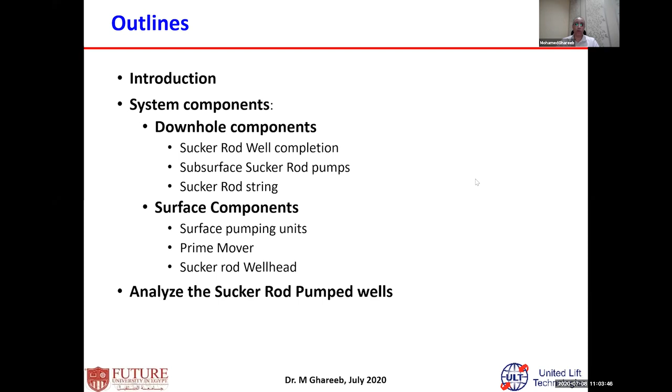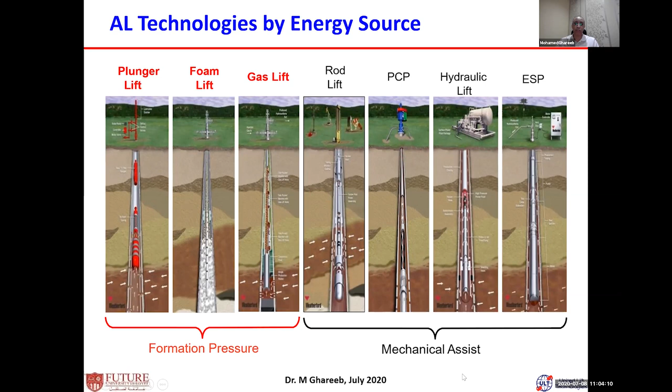We talked in the introduction of the artificial lift system about the different types of artificial lift: either using formation pressure to assist the fluid to reach the surface with a certain wellhead pressure capable of moving the fluids to the separators, or mechanical assist. Mechanical assist has different types. Today our subject will be about the rod lift system, or reciprocating sucker rod lift system.

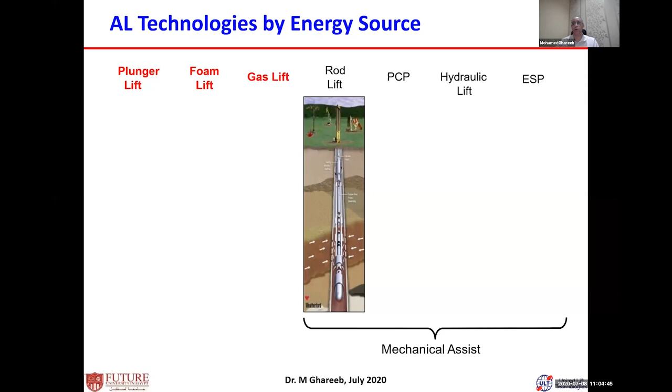This type of artificial lift has been used for more than 5,000 to 7,000 years. Currently, over 72 to 75% of artificially lifted wells use the sucker rod pump, the reciprocating rod pumping system. It's not only used for lifting oil; in some areas it can also be used for gas wells. How can it be used for gas wells? We can go into detail about this later on.

What is the reciprocating sucker rod pumping system? This is a picture of the whole system, from surface to downhole.

The sucker rod pumping system is the most popular artificial lift method, the pure mechanical method, used worldwide. More than 75% of wells use rod lift systems to lift from 1 barrel per day up to over 6,000 barrels per day. It uses a surface pumping unit to convert the rotary motion of a prime mover, which can be an electric motor, diesel engine, or gas engine, into reciprocating motion through the beam pumping system. This reciprocating action activates the downhole pump through mechanical links called the rod string.

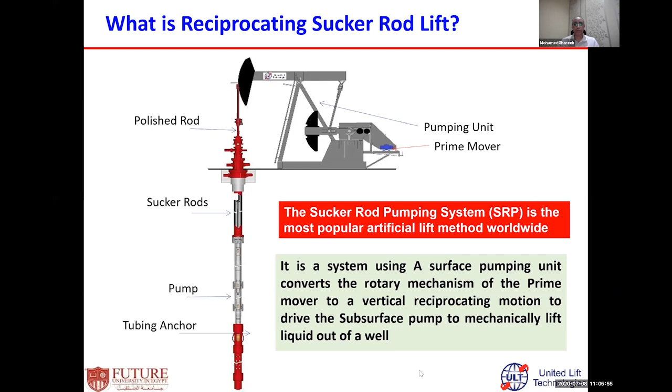What are the applications of this? As I said, more than 75% of wells worldwide use this type of system. Why sucker rod, and what type of applications can we use the reciprocating rod lift system for?

First of all, the sucker rod or reciprocating lifting system can be used for all well or fluid conditions. Sandy wells - if the well produces a very high percentage of sand, for sure there is a problem. Sand is a problem for all mechanical artificial lift types, but sucker rod can currently handle a certain percentage of sand. For example, there are wells in Oman where if you stop the well for an hour or less, you can have 1-2 joints over the pump full of sand.

Gassy wells - you can use a rod lift system for very high gas ratio wells. In the old books, they said sucker rod is for liquid or dead oil, but currently there are multi-phase downhole pumps, so a rod lift system can be used for gassy wells. It's used for all types of crude oils - heavy, medium, and APIs up to more than 50.

Some units are lifting wells with more than 50 API. Also, this type of artificial lift is completely mechanical, so it's not too affected by pumping pressure or bottom hole flow pressure. It works as long as you have a fluid level at the pump.

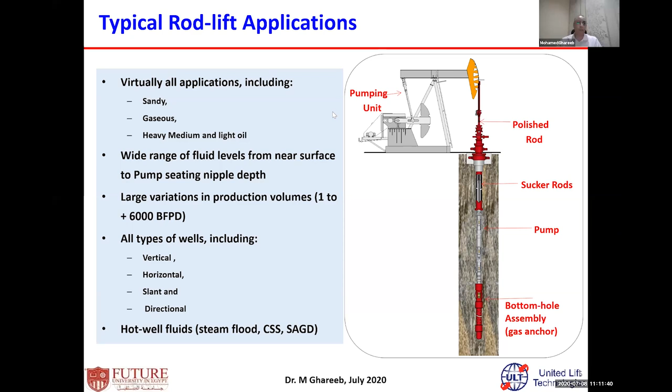But why do more than 75% of the world use rod lift systems? Why do people continue to use more and more rod lift systems?

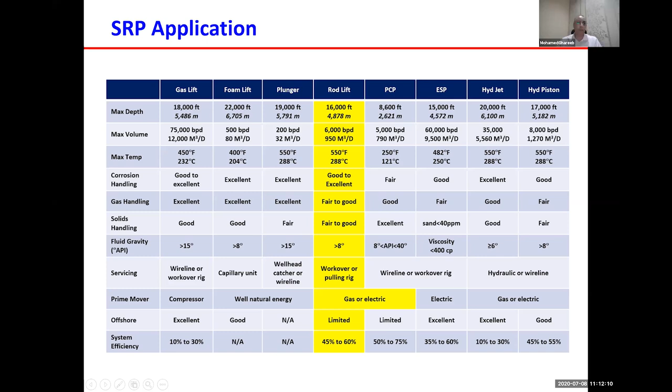According to most studies, if you are studying and screening artificial lift for your wells and you found the reciprocating sucker rod pumping system can work, use that system. Why? Because it has a very high system efficiency. The losses in power between the input power to the system and the output power to lifting the fluid are not too much.

It comes after the progressive cavity pump. This is the second type of artificial lift that can have low losses in power between input and output. All the optimization control is available, you can optimize the system from the surface to control both the downhole and surface equipment.

If you design the system to produce, for example, 1,000 to 2,000 barrels per day, and due to depletion in the reservoir the production drops, the fluid level drops, pressure drops, and production drops to about 20, 50, or 100 barrels per day, using this optimization you can adapt and use the same system to maintain production.

Positive displacement, for that reason, means you can displace fluid up to the pump depth, and you can also create very high pressures at the wells because it's positive displacement. I will show you later how the downhole pump runs to understand what positive displacement means.

If you have a problem with the material, you design the pump initially for downhole conditions suited to sweet crude oils with no CO2, and with time if this problem starts to appear, you can change the downhole material and so on, as you have very high flexibility to change the pumping parameters based on bottom hole conditions.

Very high salvage value, because the majority of the cost is in the surface equipment. 75% of the artificial lift cost in a rod lift system is in the surface equipment, so it has a very high salvage value.

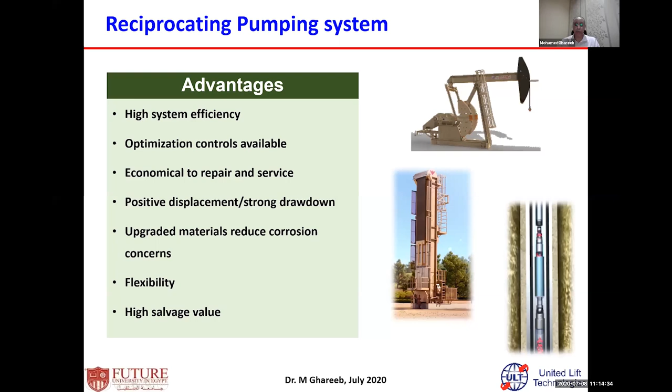For sure, like all other artificial lifts, they have some limitations. One limitation I mentioned before is that it can be used for deviated or horizontal wells, but even then the running life and mean time between failures will not be high. There is also a potential for tubing and rod wear.

For design, you need a special design, special rods, special downhole configuration in order to match special pumping parameters and so on.

Gassy wells, yes, there is a problem for gassy wells with all artificial lift methods. If you have gas, the volumetric efficiency will reduce. But this type can handle producing from very high gas ratio wells, and you can improve your downhole volumetric efficiency.

Is it depth limited? For sure, it can be used down to 16,000 or 17,000 feet. But with increasing depth, the load over the rod string and the pump will increase, so the production capability will decrease, meaning the amount of fluid you are able to produce decreases. For example, you can produce 7,000 barrels per day, but only from depths of about 700, 800, or 1,000 feet maximum. From 17,000 feet, you cannot produce more than 100 barrels per day.

You cannot use it in an area where people are living, or offshore areas, because they have some environmental effects and environmental problems and so on.

What are the system components? The previous slides were just an introduction. What are the main system components? Let us divide it into surface equipment and downhole equipment.

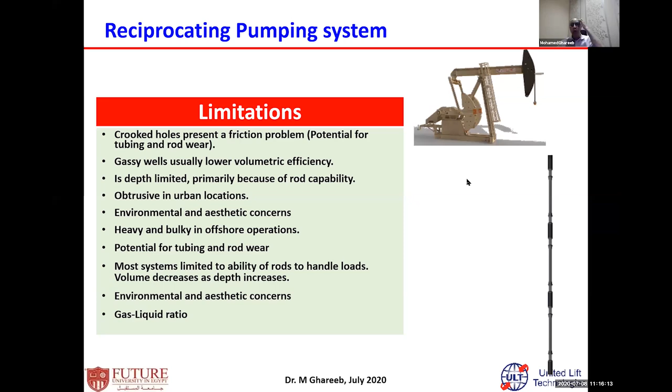Looking at downhole equipment, the first part is the sucker rod well completion. What do I need to consider in the well completion for the rod lift system? It is one of the simplest well completions, and you only need to have some, or maybe all, of these components. You need a production tubing, and this tubing can be the tubing itself, or some people use casing, hanging the pump inside the casing, and you can produce with no problem using a special downhole configuration.

But if you use tubing, you need a seating nipple to set the pump in a certain position. Plus, for certain wells, when the depth increases more than 3,000 to 4,000 feet, there's a tendency of tubing movement with the pump reciprocating.

Then you require what you call tubing anchor catchers, and so on, just to eliminate tubing movement, plus the wellhead of the sucker rod, and so on.

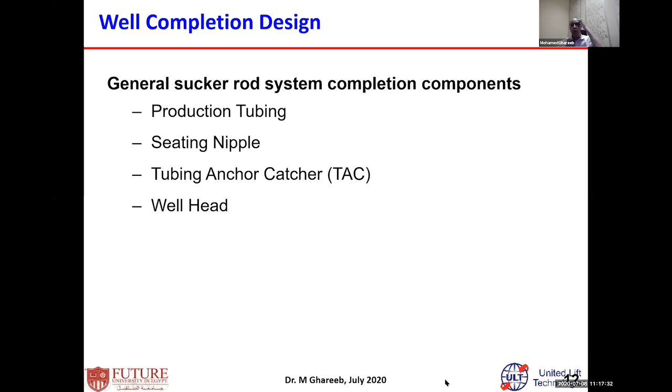In a very simple way, if we assume this is a casing and this is the formation, you need just to run the tubing. For shallow wells, you only need the seating nipple. This is a very simple completion for the rod lift system for wells produced from 3,000 feet and shallower.

Then you can run the pump. This is a downhole pump. You run the pump over the rod string and sit it inside the seating nipple. This is a very simple completion for the rod lift system.

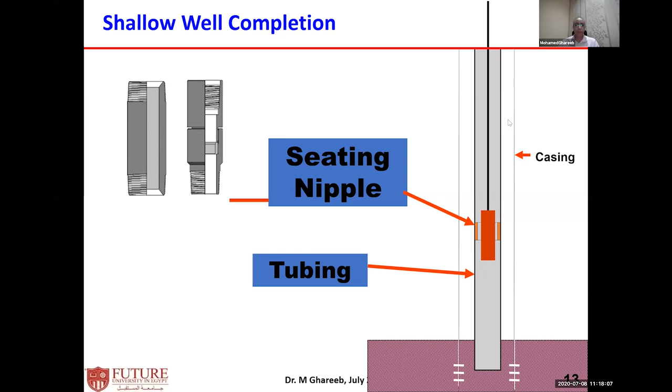What else? But remember, this sucker rod is moving up and down. While we are moving up, this is a rod string, and this is a tubing. This is a pump, and this is what we call the traveling valve.

This is the standing valve. While we are going up, the traveling valve is closed, then you're lifting the weight of the fluids. What is lifting the traveling valve with a plunger is the rod string. Then all the weight of the fluids will be on the rod string, and the rod string will be under tension, but there will be no fluid load on the tubing itself.

Then the tubing is contracted, and you have this shape of buckling of the tubing. In the downstroke, this valve is open, and all the weight transfers to the standing valve, which is connected to the tubing, so the fluid load transfers to the tubing. This is the tubing's expansion. Then you have tubing movement with each stroke.

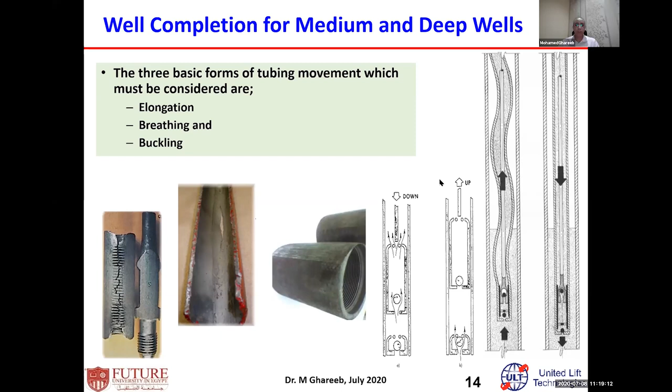In that case, you need to have what you call a tubing anchor catcher, just to fix the tubing to the casing in order to prevent tubing movement during the pumping cycles. Then, as we said in the previous slides, you need to have tubing plus seating nipple.

Here, with wells producing from 3,000 feet—some people use 4,000 feet or 2,000 feet depending on the pump size and some other conditions—you need to use what you call a tubing anchor catcher, just to eliminate tubing movement.

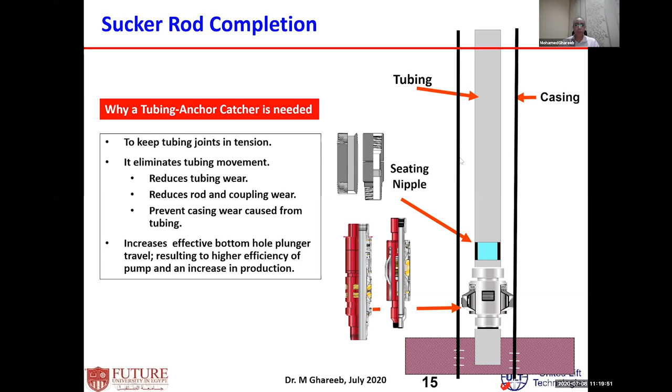Eliminating tubing movement helps reduce tubing wear and reduce coupling wear on the sucker rod, and even the tubing coupling can be connected—otherwise we have friction with the casing, which can cause other problems. And this will be the other very simple completion.

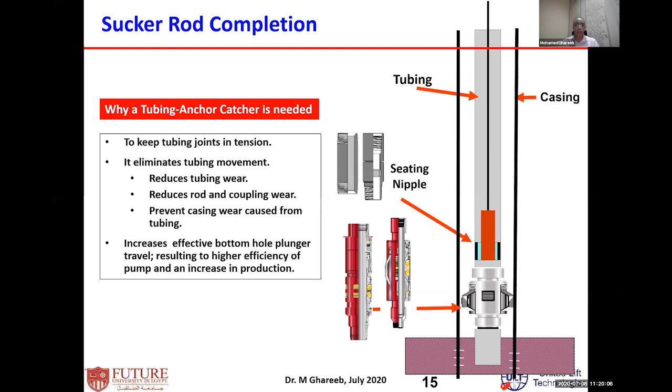So these are two simple completions for the rod lift system. For sure, there are some complicated completions and other requirement completions, like what we are using in Algeria and some other areas in Saudi Arabia and elsewhere.

They are using a downhole sensor with the pumps. They are using downhole fluid injection just to melt some salt and reduce the salinity. If you need downhole monitoring, a lot of things are involved. Sometimes you need to produce from two different zones, and you need to separate the two zones, so you run two packers and so on.

However, the majority—more than 85% of the wells worldwide—use the two types of completion I presented before. What is the heart of the rod lift system?

It is the sucker rod downhole pump. The downhole pump, as all people name it, is the heart of the pumping system. All the system is designed to operate this downhole pump. If you operate this downhole pump at good efficiency, then you will have very good efficiency for the total system.

It's just an assembly of small pieces, small parts, connecting together to form what we call the complete downhole pump. Let me show you later on the pieces and parts that the downhole pump is composed of.

What are the functions of downhole pumps? As I said before in the introduction to artificial lift, any downhole pump has two main functions. First of all, the downhole pump should decrease the bottom hole flowing pressure against the formation.

Why do you need to decrease that? In order to allow the formation to produce or give you the desired production you want from the formation. Meanwhile, after reducing this pressure, you need to lift it to the surface. How do you lift it to the surface?

This pump should be increasing the discharge pressure after the pump in order to lift the fluid to the surface, overcoming pressure loss with the wellhead pressure capable to move this fluid to the nearest separator or tank and so on.

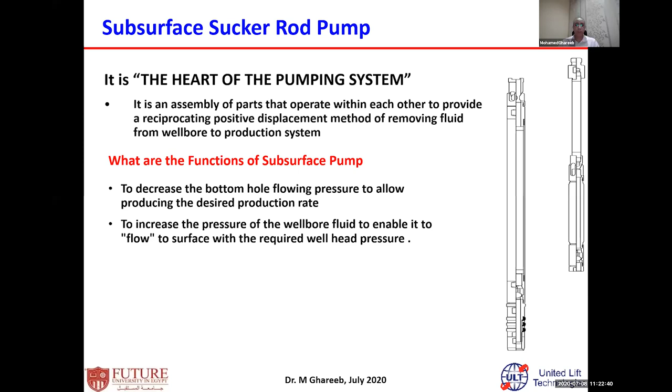How does the downhole pump run and work? As a pump cycle, we have two cycles: when the pumping unit is going up, we call it upstroke, and when it starts going down, we call it downstroke. What's going on in the upstroke? The downhole pumps have two main valves.

While going in the upstroke, this is the plunger and the traveling valve. When you start to go up, it moves against the fluid, and all the fluid pressure above the pump will close that valve. As you go up, this valve will be closed, isolating all the fluid pressure above the traveling valve from the standing valve, so there will be no pressure on top of the standing valve.

What will happen? Below the standing valve is formation pressure, the bottom hole pressure, which is low. This pressure will open the standing valve because here the pressure is very low. So it will open. While going up, the traveling valve displaces all the fluid above it, in the plunger, into the tubing.

Meanwhile, the area below becomes vacant, so the standing valve will open. Fluid from the formation starts to fill this area until we reach the end of the upstroke. In an ideal case, if you have enough fluid to fill that area, the fluid below the valve comes from the formation and this area will be completely full with new fluid.

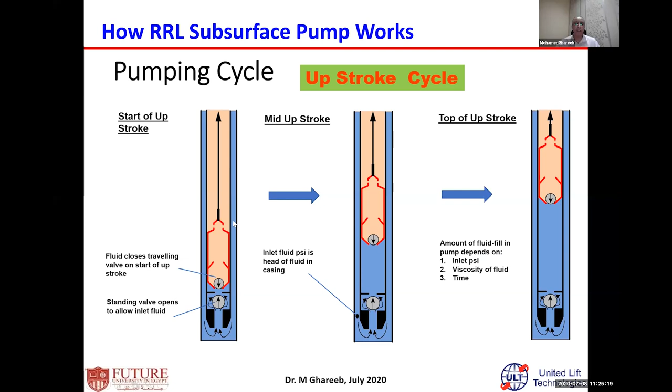What will happen here? The flow is going down. The direction of the fluid changes, affecting that valve, so this valve will be closed. When the traveling valve starts to move down, it moves against the closed area. The fluid is incompressible, though if you have gas there is some compressibility.

This valve can be slightly closed until it reaches a certain pressure. The traveling valve goes down until the pressure created below it is higher than the hydrostatic head of the fluid column from the pump to the surface, plus wellhead pressure, plus pressure loss. At that point this valve will open and start displacing the new fluid to move above the traveling valve, until you reach the end of the downstroke.

Then all the fluid produced in the upstroke is transferred in the downstroke, and the cycle repeats again, up and down, up and down. One cycle of up and down is called one stroke. The unit can run around 10 strokes per minute, meaning 10 cycles up and down. The number of strokes is a function of how much production is needed from the well, and so on.

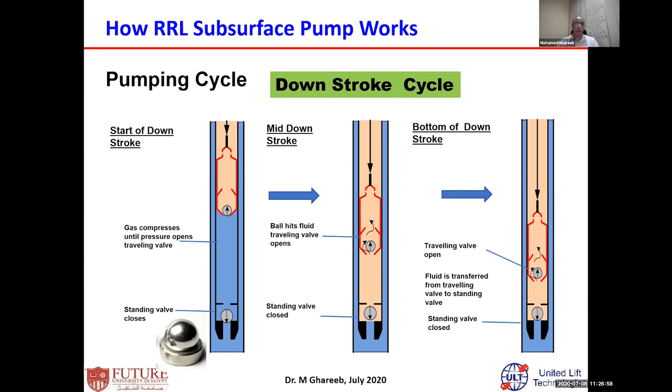Generally speaking, since rod lift systems are now used for different types of fluid and different conditions—sand, high volume, low volume, and so on—there are different configurations of pumps in the market. API started to differentiate between pumps, dividing downhole pumps into two main categories.

One is called the tubing pump. That means a part of the pump—the pump barrel's outside diameter—runs as part of the tubing, connecting to it, while the rest runs on the rod string. The other configuration is the insert pump.

Insert pump means the whole pump type runs inside the tubing. Since rod lift is a forgiving system with a lot of technology for different fluid conditions, even within each category there are subcategories. The first and main one, used by the majority, is called the insert rod pump.

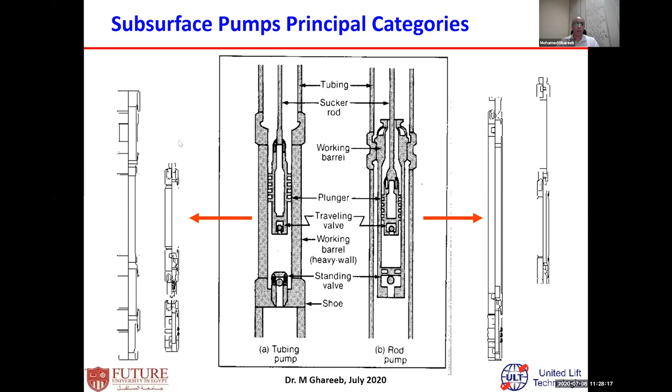Insert rod pump means the whole pump runs inside the tubing. Remember the tubing has a seating nipple. Assume this is the tubing—insert pump means the whole complete set of the pump connects to the rod string and runs inside the tubing, like this.

This is the tubing and the seating nipple. Insert pump means this whole assembly goes inside—the plunger configuration will be inside the pump, connected to the rod string, and the whole pump runs inside it.

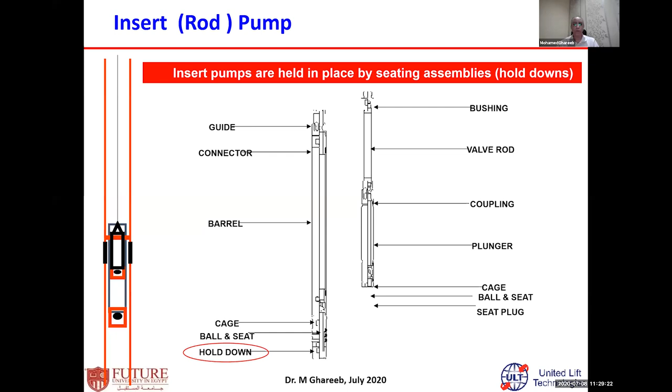Even for this insert pump condition, it's not just one type. There are different pressures, different sand accumulation tendencies, and different conditions. Even API manufacturing makes insert pumps for different conditions. For example, I will explain the difference between them.

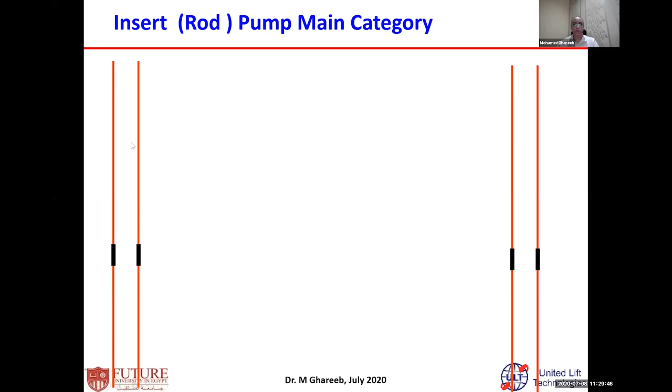Even for insert pumps, it depends on where the pump is hanging—does the whole pump pass through the setting nipple, or can it be set above the setting nipple? In that case, API or the manufacturer defines two types of pump. One is called the top anchor pump, meaning the pump connects from its top.

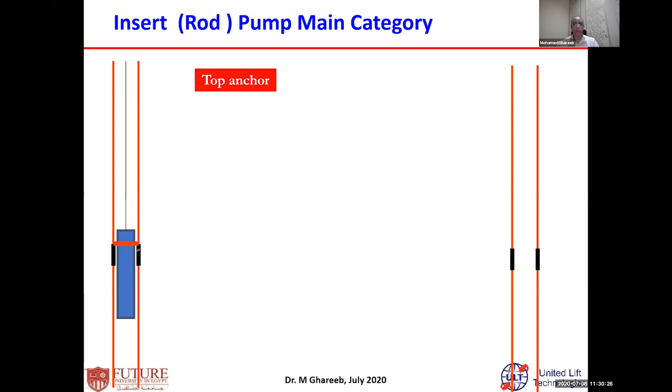The other type is called the bottom anchor pump—here the setting assembly is at the bottom. What's the difference between them, and why do you have top and bottom anchor pumps?

For example, if I'm producing a well with some sand, remember rod lift systems can sometimes reduce rates to 100, 200, or 50 barrels, which lowers fluid velocity and thus sand carrying capacity. If the well stops for maintenance, sand can settle between the pump barrel and the tubing, causing the pump to become stuck and unusable.

If you have sand and this tendency, the bottom anchor pump is not preferred—the top anchor pump is recommended instead. Someone might ask, why not just use top anchor pumps for all wells? The answer is no, because top anchor pumps also have other problems.

The whole pump has to pass through the setting nipple, so the pump size inside the same tubing will be smaller. Also, remember during the downstroke, for the traveling valve to open, the pressure below it must be higher than the hydrostatic head plus the wellhead pressure—but the pressure outside the pump here is low.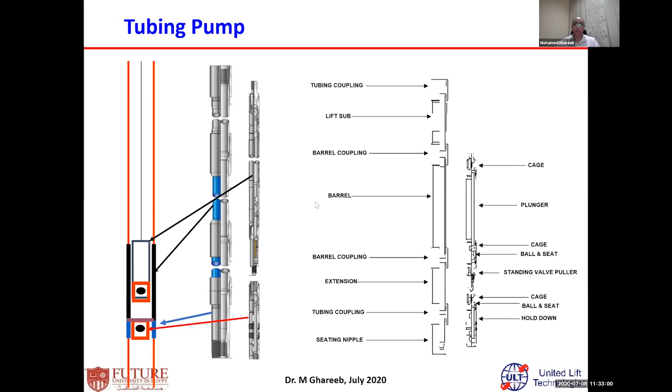What are the main components of the pump? Since we say the pump is the heart of the system, whatever type of pump you have - insert pump, top anchor, bottom anchor, tubing pump - all pumps must have 5 main basic parts, plus some other connections. If you look at this pump and count the connections, you'll find almost 22 pieces of the pump, but those 22 pieces are things like nuts and other connections. The main heart of the system is only 5 parts.

The first one is the barrel, the housing of the pump. The second part is the plunger. The plunger is a sealing element which moves inside the barrel, sealing the fluid from the top to the bottom. It does not allow the fluid we are producing in the upstroke to bypass the pump and go back again.

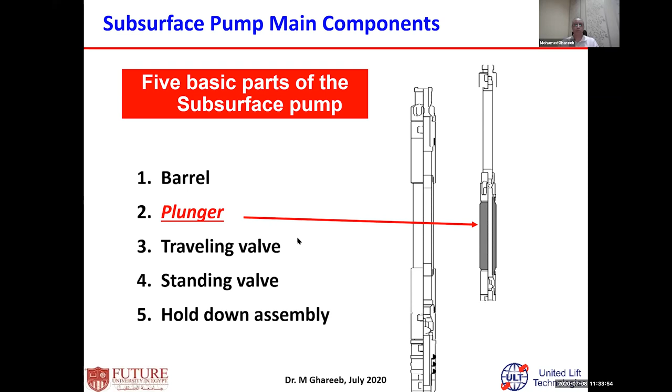Plus 2 valves - all pumps have 2 valves. These 2 valves are the traveling valve and the standing valve. Both valves have the same configuration: ball and seat. It's a non-return valve, a check valve, opening from bottom to top, opened by delta P.

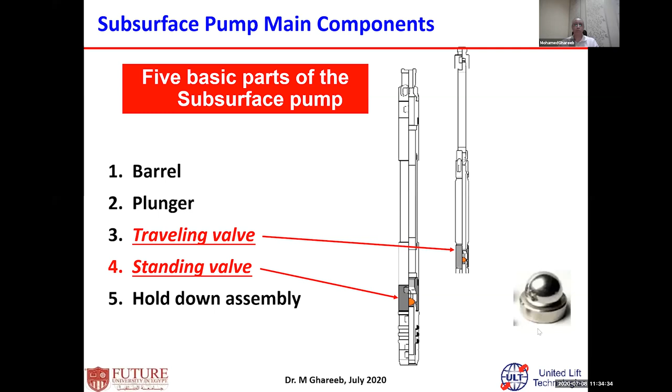Plus the seating assembly - where you set the pump, at what place you set the pump, whether it's at the bottom or at the top. In the market, there are different types of seating assemblies: cup types, plastic types, and also mechanical types, depending on the well condition. These cups can be in the bottom, these cups can be in the top, and so on.

Plus, one of the main advantages of the rod lift system: even if you don't have a seating nipple in the well and you have a temporary well completion and need to run the pump at a certain depth, there is what we call an insert pump anchor. You can connect this pump anchor to the bottom of the pump, remove the seating assembly and connect it to the bottom of the pump, then run it inside your tubing and set the pump at any depth in the tubing.

For example, if you have a flowing well that ceases to flow and there is no workover available, but you want to produce this well, you can produce it using a rod lift system with an insert rod pump. If you have a tubing leak in some area and so on, there are different applications for this. When we go into details for the rod lift system class, we can explain this more.

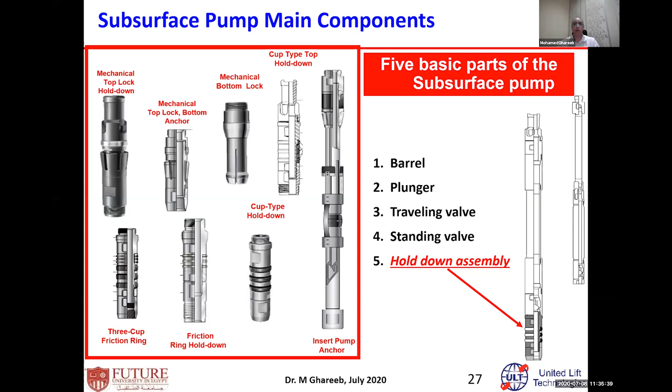Okay, this is just other aspects of the rod lift system. Generally speaking, in a very brief way, even since we have a variety of pumps - top anchor, bottom anchor, insert pump, tubing pump, mechanical anchor, mechanical cup types, and so on - the API said, let us have one configuration, one designation, so that all the people worldwide can speak the same language.

Since the API configures the pump and defines it with a certain configuration, it's very important for everyone working in this area to know that. They define the pump by what tubing size you need to run the pump.

This is the first two digits indicating the tubing size. For example, if I have 2-7/8 tubing size, then the first two digits to designate and define the pump will be 25.

That means this pump will run in 2-7/8 inch tubing. The three more digits after that refer to the pump size, the pool pump size, which should run here. If you have a smaller pump, you cannot use smaller tubing, and you cannot run a bigger pump that won't pass inside the tubing. The first two digits give you the outside diameter of the tubing.

The second two digits tell you what can run here - it can be a rod pump or a tubing pump, and what size of pump. Also, if you look at the tubing and rod pump, the barrel has to withstand the pressure inside - that's the barrel thickness, the wall thickness.

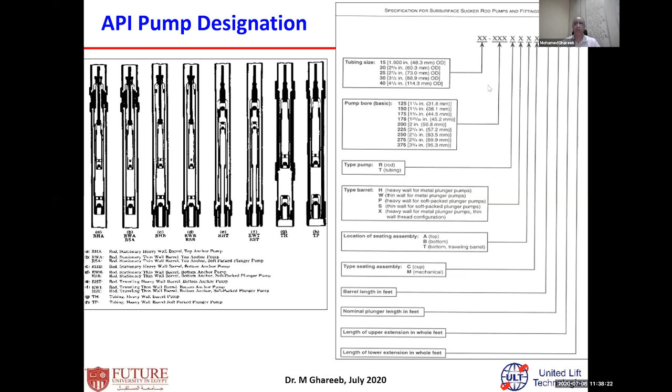Let me give you an example to make this clear. The API designation might say: I have a pump, 25-150-RHBC, 12, 5, 3, 2. This is my downhole pump, and this is my tubing. 25 means the tubing size is 2-7/8 inch.

150 - if you put a decimal point, that means the pump size, or plunger size, or inside diameter of this pump, is 1.5 inches. Then when you calculate your production, you have the plunger size, stroke length, and strokes per minute.

What type of pump is this? If you look at this type, the whole pump is inside the tubing. The R means insert pump or rod pump.

What else do we have here? The barrels - the thickness of the barrels. These barrels can be thin wall barrels or heavy wall barrels. The thickness needs to be heavier in order to withstand higher pressures - the design requires this.

This pump is a bottom anchor - see, it's bottom anchor. This is the anchor of the pump seating assembly, connecting from the bottom. So this pump is a bottom anchor pump.

Cup types - you may see cup types here, not mechanical. This is a plastic cup type, easy to unset and set this pump. This barrel length, from here to here, is 12 feet - the 12 means the barrel length is 12 feet.

Then 5 feet - what's that? It's the plunger length, 5 feet. The plunger length depends on how much delta P is across the plunger. If I run a plunger in deep wells, I need a longer plunger to withstand more pressure across it. In shallow wells, maybe I need 1 or 2 feet plungers. In deep wells, I might need 7 or 8 feet plungers.

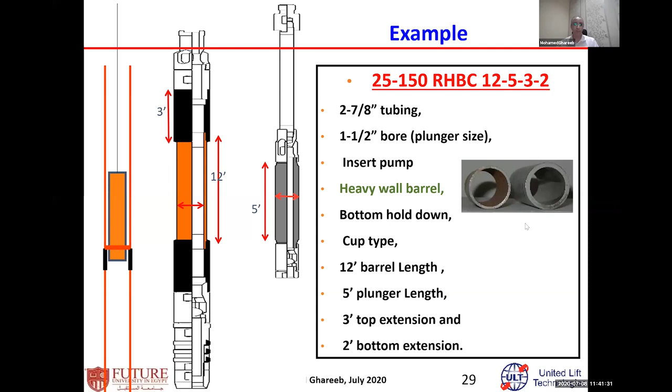The other part in downhole equipment is what we call sucker rod strings of the pump. What is a sucker rod string? The rod string is a mechanical link connecting the downhole pump and the surface equipment.

The downhole pump, in order to run, should be reciprocating up and down. It receives the reciprocation from the pumping unit, which is going up and down. But what connects and transfers this reciprocating motion from top to the bottom of the pump?

It's what we call the sucker rod, the rod string. There are different types, different configurations. This is the simplest way, the more common configuration of rod string used worldwide. I will show you on the next slide the difference between this and others.

Since the rod string is connecting the pump to the surface equipment, in the upstroke the rod string is just lifting its own weight plus the weight of the fluid connecting to the top of the traveling valve.

The rod string going up and down is one of the many critical important parameters in the sucker rod configuration. It's subject to cyclic load. In the upstroke it's lifting its weight plus the fluid weight. In the downstroke, there is no fluid weight, so you're lifting only its own weight. The rod string is subject to different loads in upstroke and downstroke.

If you remember, with a very simple calculation, if this system is running at 10 strokes per minute, this rod is going 10 times up and down with different loads in upstroke and downstroke per minute. That means 14,400 times per day with different loads.

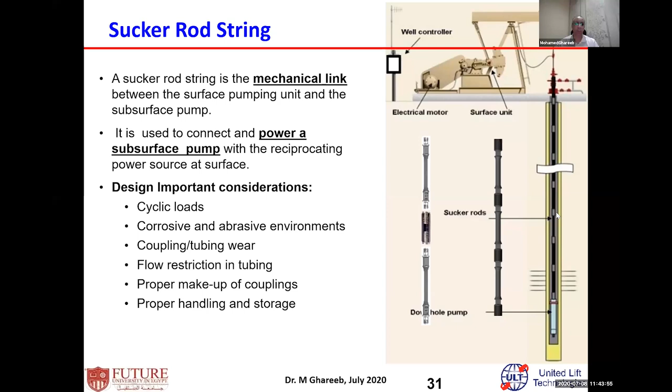What type of rod string? There are different types of rod string, dating back about 200 years or more. There was only wooden rod string. With new technologies in rod string manufacturing, and requirements to produce deep wells, heavy wells, and high volume wells...

In the market, they have introduced many types of rod string. However, the main common rod string is this one, what we call jointed sucker rod. Sucker rod is made of pieces and joints, and you can connect each piece and joint at the well site.

The first one is a special steel conventional sucker rod. Plus there is a hollow sucker rod. The normal sucker rod is a solid bar.

But for a special, small application, there can be a hollow sucker rod, though this will have very limited load capacity. Plus some people have started to introduce what we call fiberglass sucker rod, where the body of the sucker rod is fiberglass.

Remember, I said the capability of the rod lift system to produce high volume from deep wells will be low. Why? Because when going deep, you need to lift fluid weight plus the weight of the rod string, and as you go deeper, the weight of the rod string increases.

Then manufacturers started to introduce something lighter, like fiberglass. However, each type has some advantages and disadvantages. One of the main disadvantages of fiberglass is the temperature sensitivity and the elasticity. If it's broken, the fishing operation is not easy.

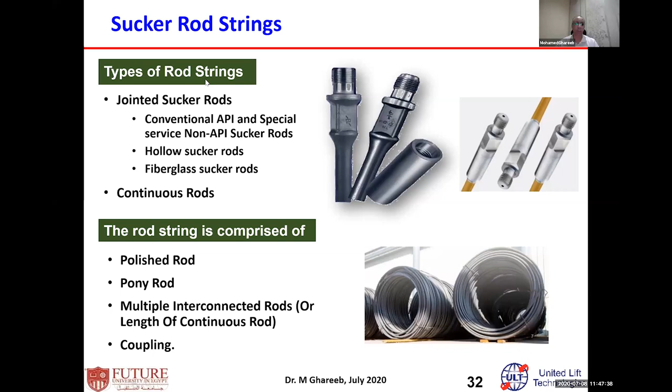If we talk about steel, more than 70% of wells currently use sucker rod, and the main common sucker rod is steel, commonly in two different lengths, either 25 feet or 30 feet, plus accounting for the coupling and so on.

The two ends of the sucker rod are male, and you connect them using a coupling, which is female.

Diameter of sucker rod: there is an API standard for sucker rod ends, starting from 5/8 inches up to 1.5 inches with an increment of 1/8 inch. For example, after 5/8 inches, if you add 1/8 inch, it becomes 6/8 inches, that means 3/4 inch. If you add 1/8 inch to the 3/4, you get 7/8 inch, then 8/8 inch, and so on.

Plus, the pony rod is just a sucker rod with a small length. Lengths can be 2 feet, 4 feet, or 6 feet.

According to API standards for sucker rod, there are 3 main API grades. Grades mean how much load, how much tensile strength this sucker rod can withstand. According to API, there is grade C, grade K, and grade D.

Plus, you have high tensile strength sucker rod which is not API, because API sucker rod has limited capability to handle certain loads and overloads. But sometimes you have heavy weight, heavy loads, deep wells. What do you need to do? The manufacturer starts manufacturing a sucker rod with more capability, more capacity than this.

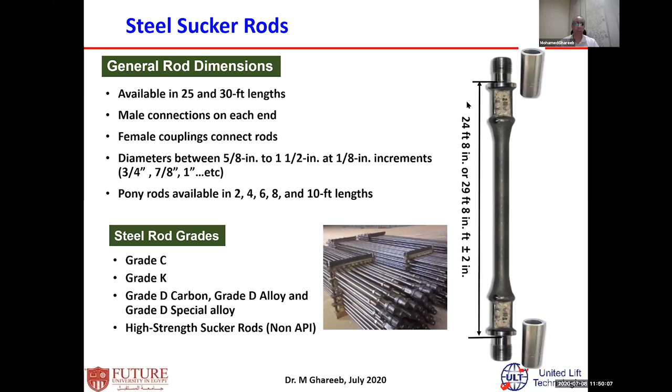The second type, the new technology of the rod string, is called continuous sucker rod. If you look at this one, this is a jointly connecting sucker rod, what I just explained, joined together. In order to bend sucker rod in this area it will be very hard, because the sucker rod will be a bit stiff, plus the coupling outside diameter is high.

Then you create here what you call very high friction loss, side loads in the tubing. Then you have friction, very high side load between the tubing and the coupling here. This will create a very high wear tendency here.

If you look at a standard sucker rod, the flow resistance for fluid passing between the coupling and the annulus clear area between the couplings and the tubing will be very high. There will be a very high pressure loss, creating also a piston effect.

But for continuous sucker rods, there is no coupling, it's one joint connected from top to bottom. One of the main problems is that it requires a special rig to run this, which is not available in all areas. The handling and transportation is a little bit expensive. But for horizontal work, deep wells, and some other special applications, it's proved to be a very good type of rod.

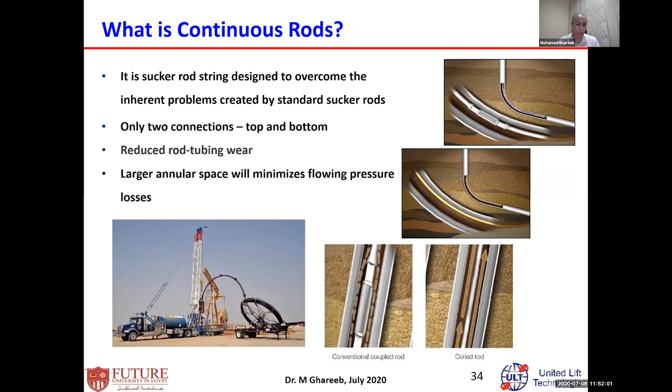Since the sucker rod is just used for the mechanical link from top to bottom, nothing else is needed from the sucker rod, especially for reciprocating rod lift, and it's lifting its own weight. Then why use one size of sucker rod from top to bottom? The top part of the sucker rod is lifting all the weight of the sucker rod below it, plus the weight of the fluid. But the bottom part is lifting only the weight of the fluid. So why use a bigger size of sucker rod for the whole string?

So API decided, let us design, especially for deep wells, what we call a tapered type rod string. Tapered type rod string means I use a bigger rod string at the top and a smaller rod string at the bottom, but it should be distributed smoothly.

I can use one size, and the second size should be exactly less than the one above it by 1/8 inch. Remember, the sucker rod size changes in increments of 1/8 inch. That means 1 inch is 8/8, 7/8 inches is 7/8, and 3/4 inches is 6/8.

In order to design a tapered rod string like this, there is a special design formula you can use. Special software like S-Rod, Rodstar, Q-Rod, and others can be used to define what configuration needs to be used.

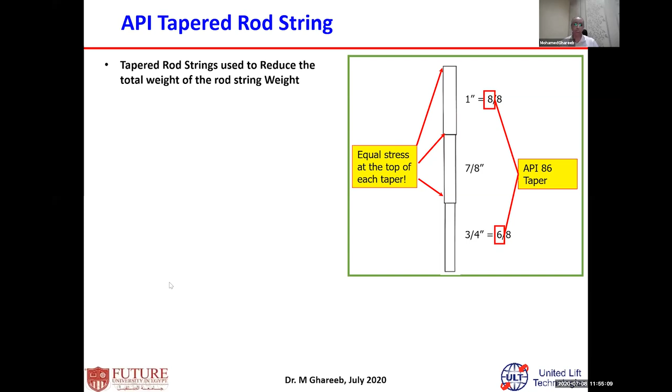Let me give you another example. If I say I have my API rod string 65, that means I have 2 tapered rod sections, 6 and 5, 3/4 and 5/8 of an inch. 88 means I have the rod string from top to bottom all one size, 1 inch, but it must have 2 digits because API defines it with 2 digits.

97 means a 97 tapered API rod string. I have 9, which is 1-1/8 inch, and 7, which is 7/8, so I have 3 tapered rod sizes.

The tapered rod string is used just to reduce the weight of the rod string itself, nothing else is required. If you reduce the weight of the rod string, you can also reduce the weight on the pumping units. Reducing the weight on the surface pumping units, you can use smaller pumping units. Reducing the weight on the pumping units also reduces the load on the motor, so you can reduce the power consumption. There are a lot of functions for using a tapered rod string.

Then for the tapered rod string, again, in order to be API compliant, the rod string distribution along its length should have equal stresses at the top of each tapered rod section.

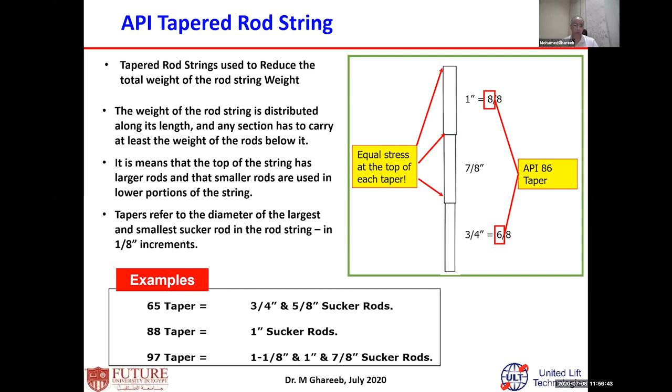Sucker rod in the downstroke is only lifting its own weight. There is no weight on the downstroke of the sucker rod, especially on the lower part, and the rod can have a tendency of buckling. Nothing pulls the weight from the bottom, and it moves against the plungers.

Then the plunger is moving against the rod itself, and the lower part of the tubing can buckle. Buckling can create big problems in the lower part of the tubing, creating friction between the rod and tubing, coupling and tubing, and so on.

So we use what's called heavy parts of the rods. For example, you can use a rod with 1.5 inches, 2 inches, and so on. This is the sinker bar, or the heavy bar, the heavy weight of the rod string. It's used in the lower part of the tubing to concentrate all the weight above the pump, to help the rod string stay under tension.

The rod string will be under tension in the upstroke, but what about the downstroke? The rod string will not be under tension. Then the sinker bar is required to provide concentrated weight on the rod string, at the bottom of the rod string, in order to keep the rod string under tension on the downstroke, not the upstroke.

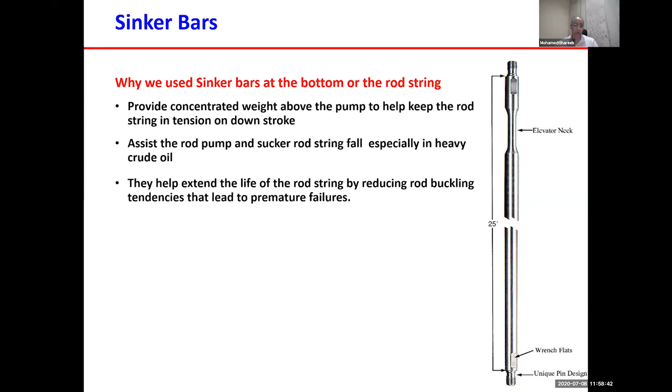It assists the pump and the sucker rod string to move easily, because in heavy crude oil there is a buoyancy effect, and frictions called viscosity frictions between the rod and the coupling, so the rod can move very slowly. We need some heavy weights on the rod to let it move faster in the rod string, through the fluid and so on.

The third part, if we move to the surface equipment, is the beam pumping unit, or just the surface pumping unit, and so on.

In the past there was only one type of pumping unit. If you go to the field, you'll find the majority of people using what's called the beam pumping unit, or pump jack. Its main function is to stroke the bottom hole pump up and down, usually reducing the speed of the prime mover to the required speed to activate the downhole pump, converting the rotary motion of the prime mover into reciprocating up and down motion. Plus, it carries all the weight of the well and the flow.

Currently, operators found a lot of problems using this unit for high volume production. For high volume there is a limitation in pumping speed, and when you increase the pumping speed, a lot of downhole problems are created: velocity increases, buckling increases, friction increases, and load on the downstroke decreases. For that reason, manufacturers started making what we call long stroke pumping units.

There is a limit to the stroke of a pumping unit. This can reach 240 inches, sometimes in special designs 260 inches, and this is a function of production. What if you want more production? Manufacturers started producing longer stroke pumping units, which can be used to produce high volume, reduce the speed, and still produce the same volume.

For the long stroke pumping units, there is a mechanical type and a hydraulic type, fully automated pumping units, and so on.

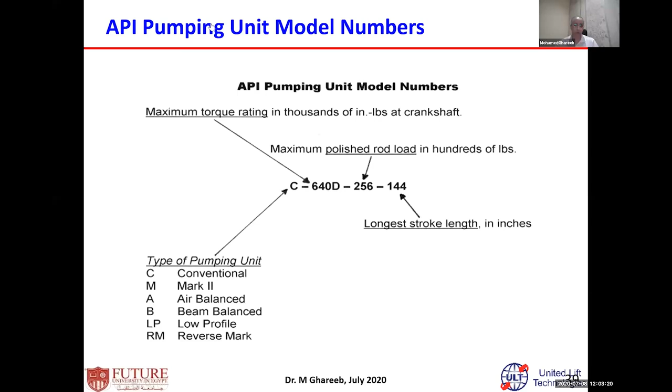If you look at these conventional pumping units, they are defined, for example, as C-912D-365-168. What does this mean? This means this configuration - this pump looks like this one. 912 means if you multiply this with 1,000, this gear reducer can rotate with this torque, because torque is a function of the load and the distance, how far you have this distance from here to here. Then what maximum torque can lift this, can rotate this.

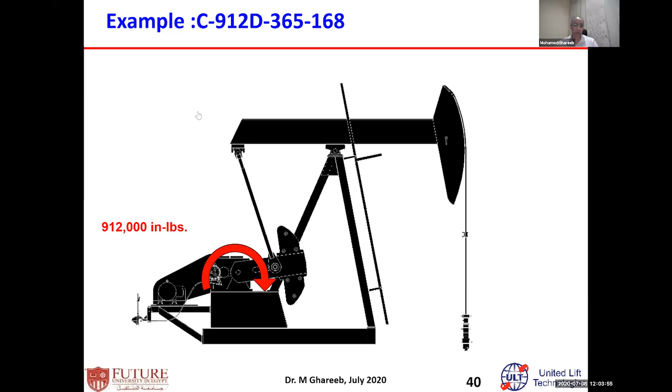Plus, the peak load - how much load, this is 365, then 36,500 pounds, how big a load we can lift from here. Plus how much the maximum stroke length you can lift, and so on.

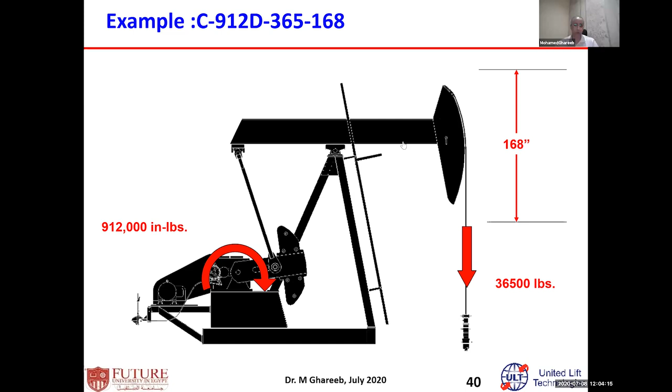Just to go to the prime mover for that - all this is introduction, we can go in details after that. We said the prime mover is the last end of the system. It's just the tool or machine required to provide the rotary motion to the pumping unit, which is converted through the gear reducers to a reciprocating motion, gear reducer and the pumping unit, and reducing the speed here.

This can be an engine, like this one. The engine can be a diesel engine, gas engine, or can be an electric motor, like this one. For sure, there is a different type of configuration. What does the sucker rod wellhead look like?

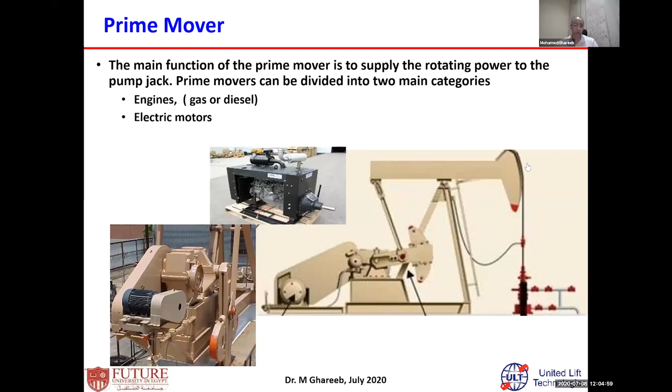Sucker rod - this is a polished rod. Remember, this is a polished rod. This is a polished rod going up and down. This is a pumping unit. For all rod lift systems, you need to have a BOP, because in case you have a problem here, you need to close this BOP in order to have any repairs here. Plus, you need to have a stuffing box.

Stuffing box is just a piece of equipment with a rubber inside. This rubber is closed over the polished rod. It allows the polished rod to go up and down without allowing the fluid to go out of the well. And so this is just a very simple way of explaining that, how we are analyzing and know the system is running and so on.

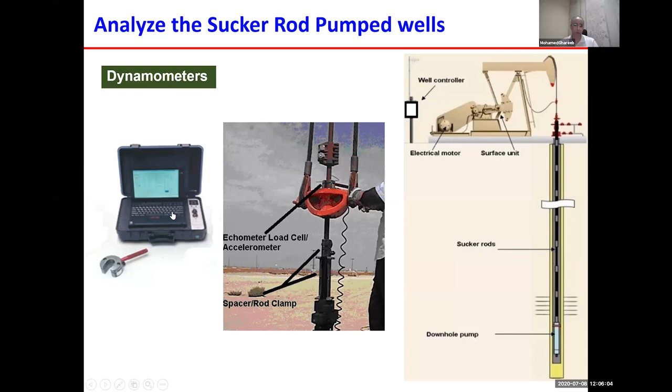One of the main famous pieces of information required from that is what we call dynamometers. Dynamometers just give you the performance of the downhole pump and the surface pump. What is a dynamometer? It's just a relation between the loads on the vertical axis and the position on the horizontal axis. What do we mean by load?

Load - while we are going up on the upstroke, you are lifting the fluid, then the load will increase. Going up from here, the load will increase until we reach the top of the upstroke. Then while we are going down, the load will decrease until we reach this point. We have two types of cards, surface card and downhole card. Really, this dynamometer card analysis and survey requires more than 3 sessions, 2 sessions to go into detail and analysis. But however, this is one of the pieces of information required for all pumping units. You can do it just using a portable dynamometer, or we can do continuous monitoring.

This is equipment installed at the well site called well managers, which can measure continuously the load with the position. We can measure the surface load and the downhole load, which gives you the performance of the surface equipment and downhole equipment.

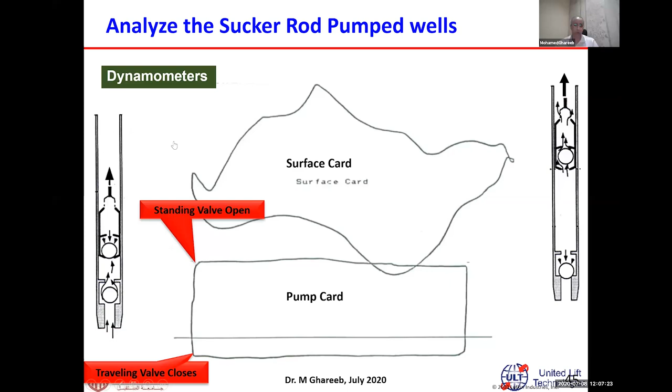There are different shapes and parameters of downhole equipment. From each shape, we can know how the pump is running - if it's running with very good efficiency, or with 50% efficiency, if there's sand inside the pump, if there's wear inside the pump, if the standing or traveling valve has a problem, or if something is stuck inside the pump. From all that, we can know how the pump is running.

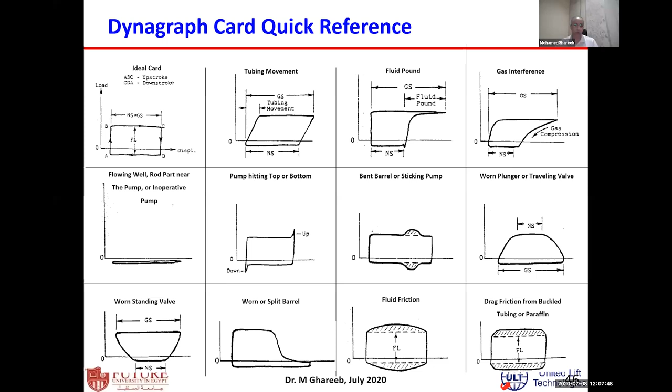This is just a very light introduction about the rod lift system, because the rod lift system requires a minimum one month daily session, at least like this. It's a system used worldwide by more than 75%, with new technology and more and more wells using it.

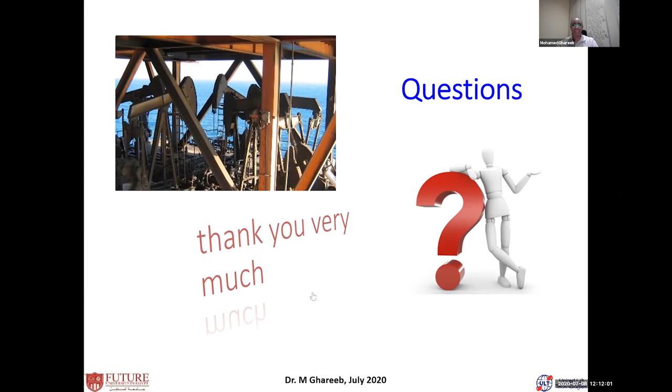Yeah, we can see it. This is offshore, huh? Yes, this is offshore. However, this is just a very special application - it's not easy to use offshore because the offshore platform is limited in size, area, and weight. But this is a very small unit, and it's very limited. However, currently with new manufacturing for hydraulic pumping units - like the light one I showed you before, with a long stroke - it can be used, but with very limited applications.